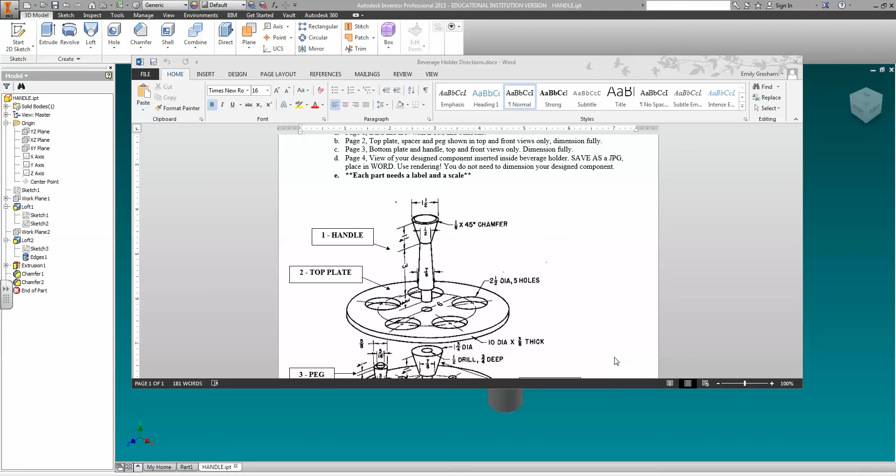The next part we're going to build is the top plate of the holder. So we take a look at that, and this one's actually pretty straightforward and simple. And if you notice, the top plate and the bottom plate are very, very similar to each other. But we're going to go ahead and build them as two separate parts.

So you can see right here, this looks like basically a circle that's been extruded, and then it has this circular pattern right here. So I'm going to do a 10 inch with a 3/8 thickness circle, and then I'm going to put a sketch on the surface and do a circular pattern, and then put the hole through the center.

Now I made this hole right here 1/2 inch big to stick through the stuff. This right here is 1/2 for it to fill in. So the problem I have is this is a half and this is a half. They're the same size. I need to go back and change this so it's a smidge smaller to actually fit into my 1/2 inch hole.

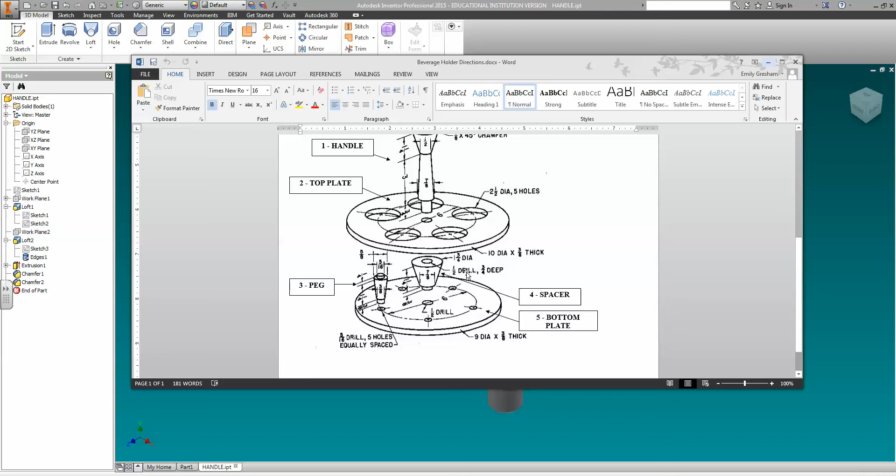And that's actually the first thing I'm going to do, because it needs to fit through this hole as well, which is 1/2 inch. So I go back here and I take a look at this extrusion on sketch 4, and I have it as 1/2 inch, and instead of doing 1/2 inch, which is 4/8, I'm going to do 3/8, and that way I know it'll fit into the hole with an 1/8 inch tolerance. Actually, an 1/8 inch tolerance is a little...

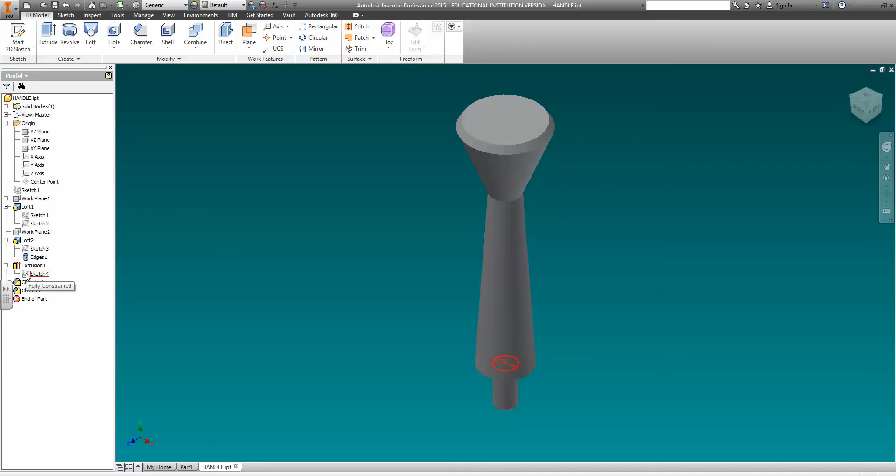I'm hitting F7 to slice it. Instead of 3/8, I'm going to do it as 7/16. So that gives me 1/16 inch of a tolerance, which is a little closer to what I want. Because I don't want it wobbly, I just want it to be able to fit through the hole.

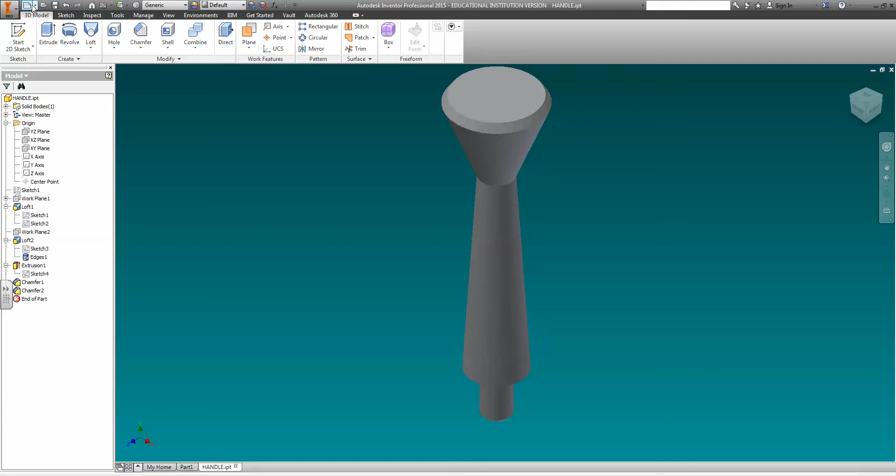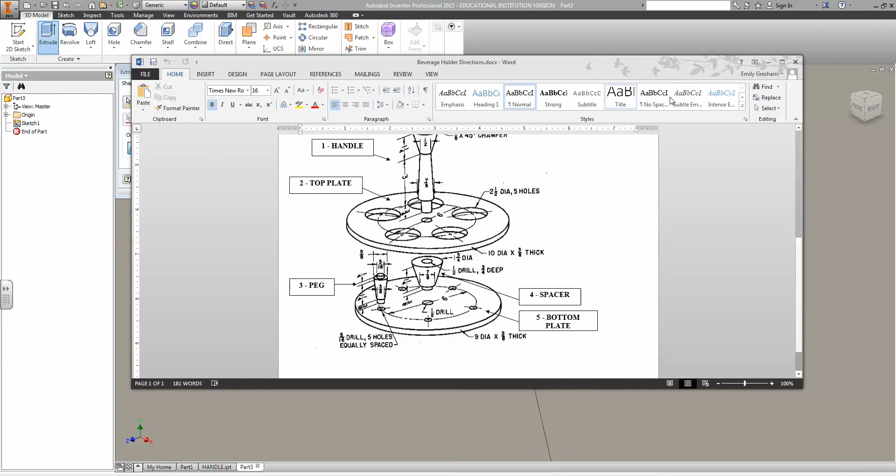So now I start my new part and start my 2D sketch. And then going to my shape here, this circle is 10-inch diameter. So to keep my life simple, I'm going to center it on the XY and make it 10 inches. And finish sketch. And then I'm going to do an extrude, and it is 3/8. And there's my circle. I'm now going to start a 2D sketch on this surface.

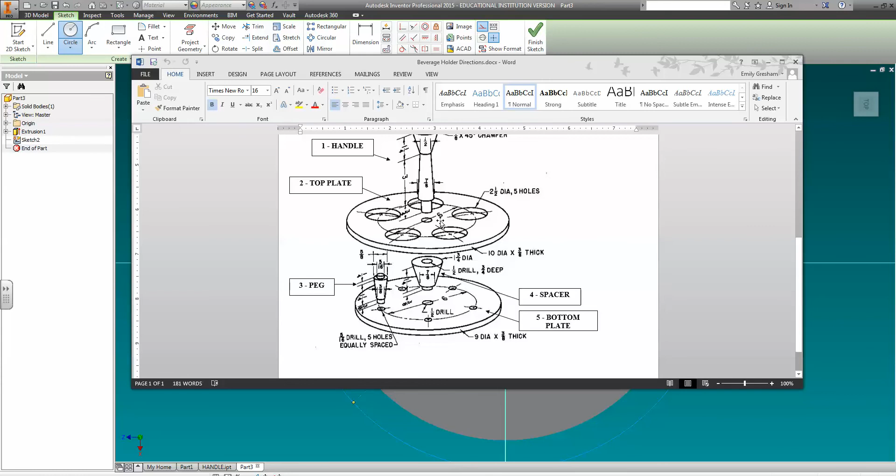And I'm going to do a construction line that is a circle. That's right here. And this inner circle has a diameter that is 6 inches. Okay. And I didn't mean to finish sketch, so I'm going to go back and reopen it, and I'm going to put a circle right here, and that circle should be 2.5 inch.

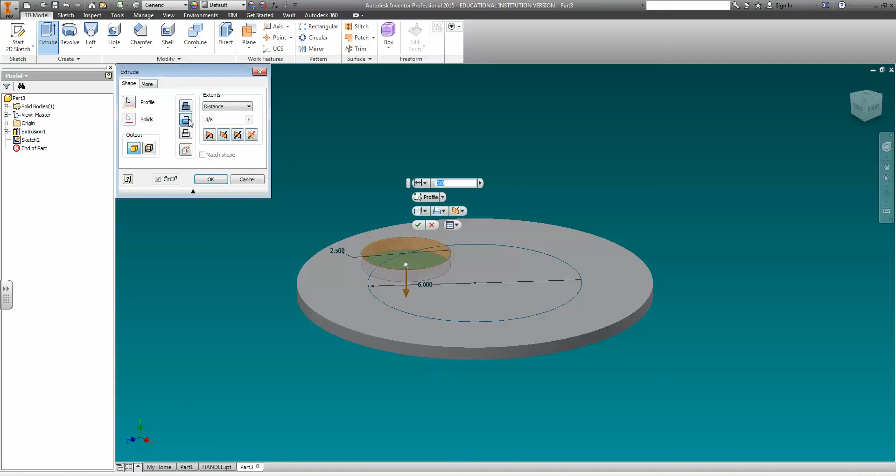So dimension 2.5, and I'm going to finish that sketch, and I'm going to do an extrude, cut through all, and hit OK. And then I'm going to do a circular pattern, and, okay, so let's try that again. I'm going to do a circular pattern of that feature, and then I'm going to select this axis, and I want to have a total of 5.

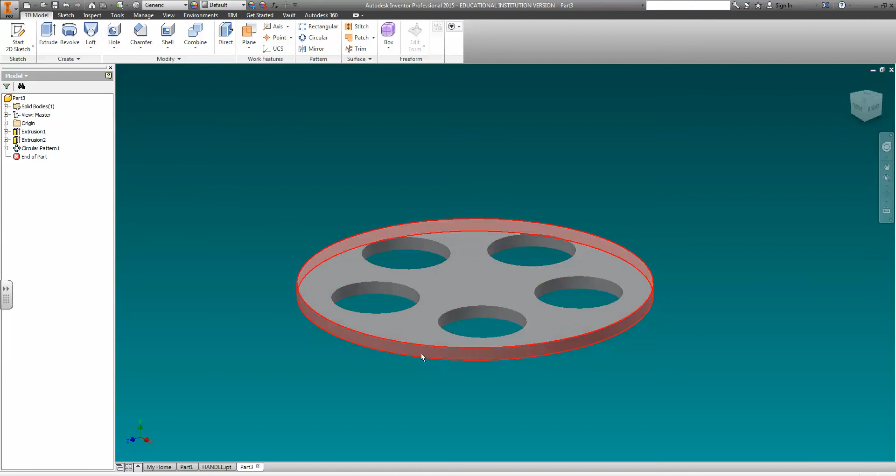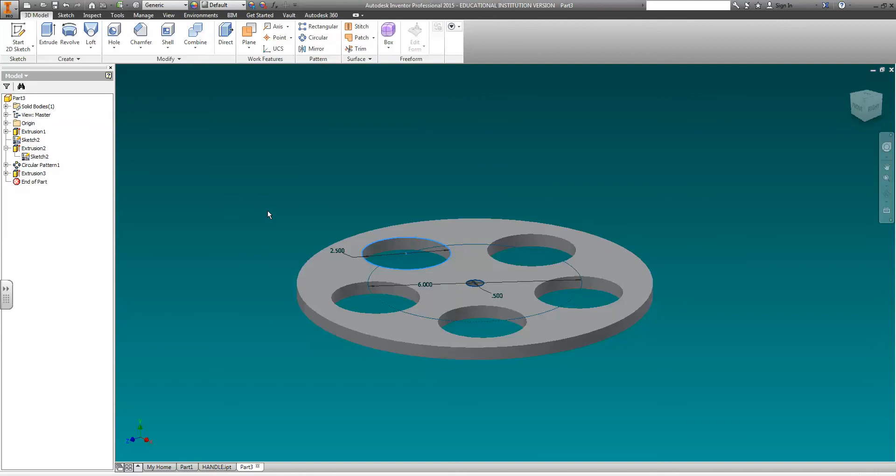Okay, and then I'm going to go back to sketch number 2, and I'm going to put a little circle right here, which is 1/2 inch. Finish sketch, make this sketch visible, do an extrude, cut through all. And then I'm going to turn off visibility, and I'm going to go home, and that is a good home view, so I'm going to leave that alone.

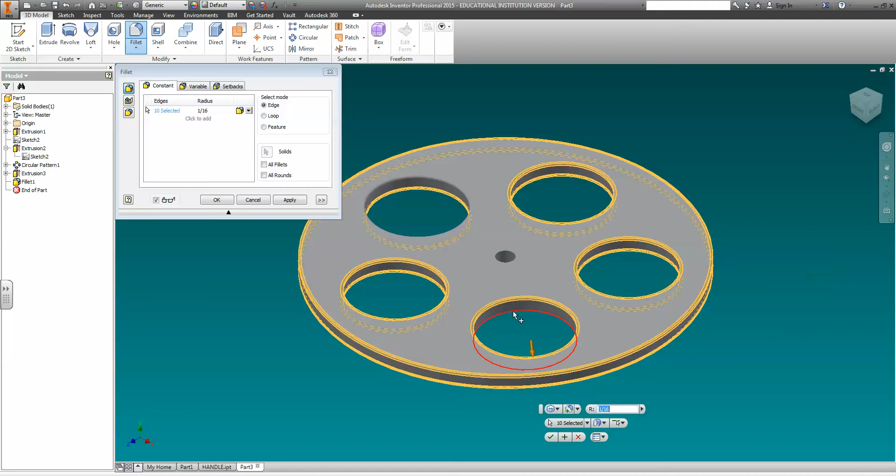I'm now going to put a little bit of finishing touches on things. I am just going to fillet my edges. I'm going to do 1/16 inch fillet. And by doing that, it just kind of gives it a little more polished look. So take a look, and it just makes it look a little more polished and finished.

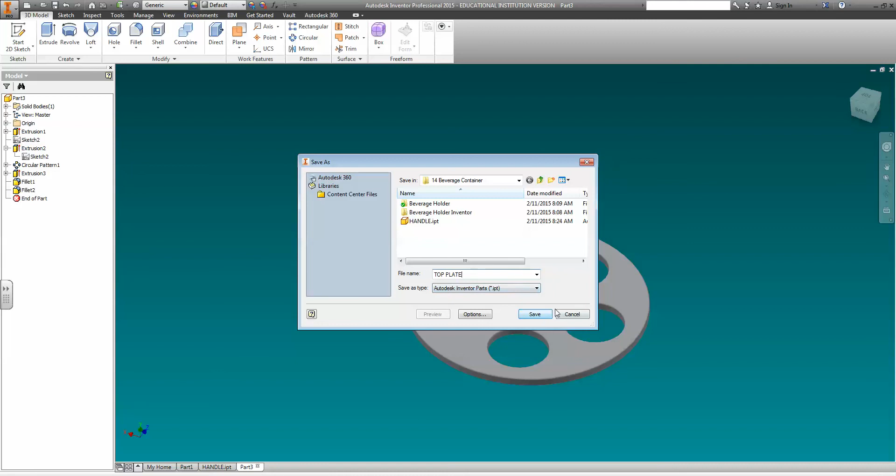So the final thing you do is pick whatever material or color you want it to be, and then you make sure you save as the top plate. Once again, it's important to save the name of the part the way you want it to show up on your drawings.